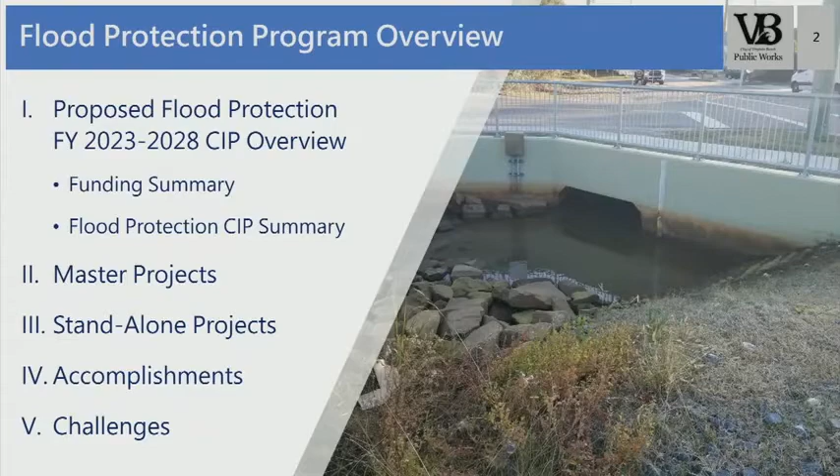I'm going to begin by giving you an overview of the program, followed by the creation of the master projects within the program. I'll touch on the standalone projects, accomplishments, and some challenges we are facing.

This is how the flood protection program is funded. The bond referendum comprises most of that funding at over 76%, followed by appropriations to date of local funding at 21.5%. The other small pots of money include flood protection pay-as-you-go at $5.5 million, federal funding at $8.1 million, which is FEMA reimbursement funds we received several years ago, and state funding of $4.1 million, which includes grant funding from the state's Community Flood Preparedness Fund. So the program has a total of $757.1 million for 41 projects.

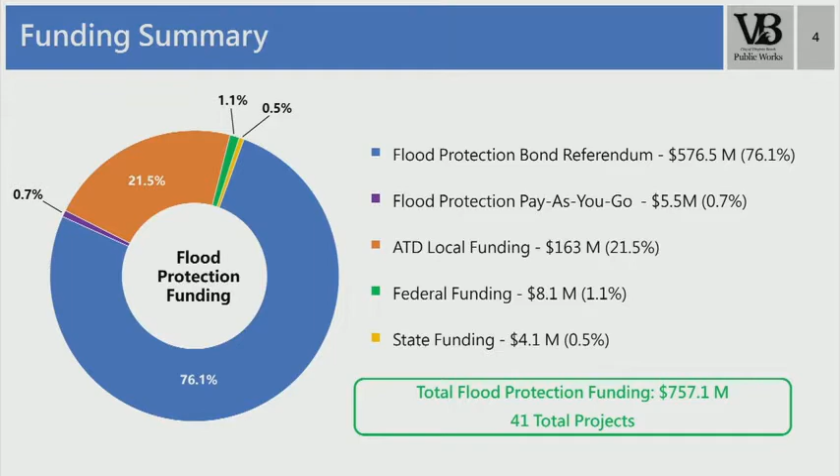The flood protection program is a new standalone CIP this year. If you recall, in the past, the flood control section was included in the stormwater CIP with operations and maintenance and stormwater regulatory. Now we are a standalone CIP.

As I said, there are 41 total projects. We have created 7 master projects that contain 30 projects within those master projects. The idea behind the master projects is they have companion projects associated with each one, and all of the appropriations to date within the companion projects can be transferred with city manager approval between projects in order to advance these projects more quickly. All transfers will be reported to the Flood Control Community Oversight Board monthly.

We also have 11 standalone projects and programs that are programmed at over $102 million included in the flood protection program.

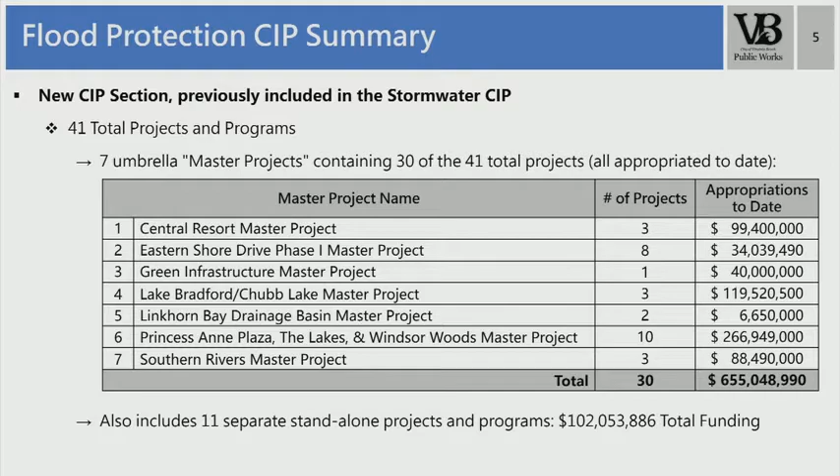Now I want to talk in more detail about the master projects. The first one is the Central Resort District. It includes three projects, and you can see the appropriations to date on each of those projects. These three projects will be constructed together. The bounding area for the Central Resort District includes Laskin Road to the north, Atlantic Avenue to the east, 17th Street to the south, and Birdneck Road to the west. These projects are still in the planning stages, and as I said, they will be constructed together.

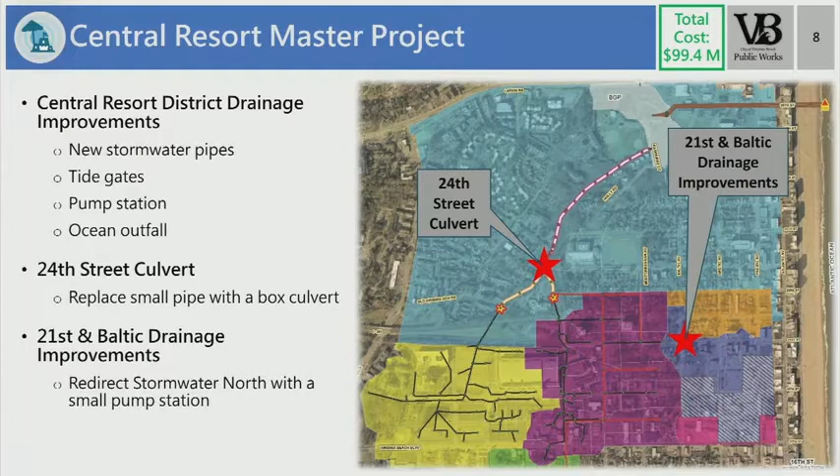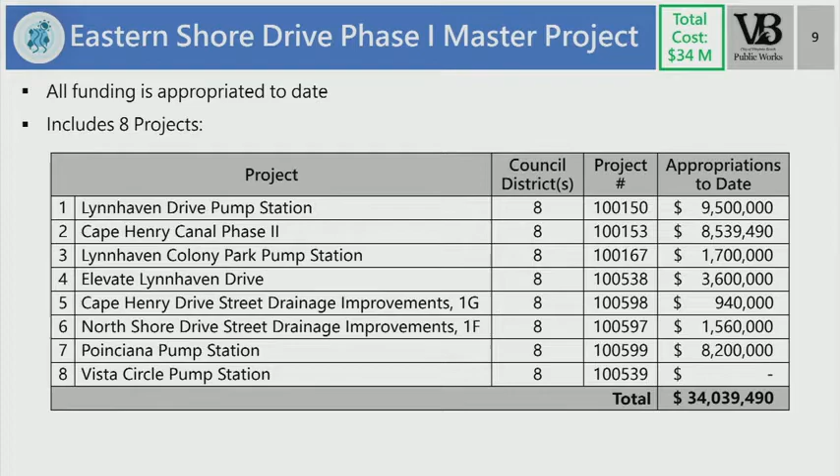The next master project is Eastern Shore Drive Phase 1. It includes 8 companion projects, with total appropriations to date of $34 million. These are all the projects within the master project. We will be constructing 4 new pump stations, side street drainage improvements along the north side of Shore Drive, and side street drainage improvements along Cape Henry Drive. We'll also be elevating Lynnhaven Drive at the intersection of West Great Neck Road and Lynnhaven Drive.

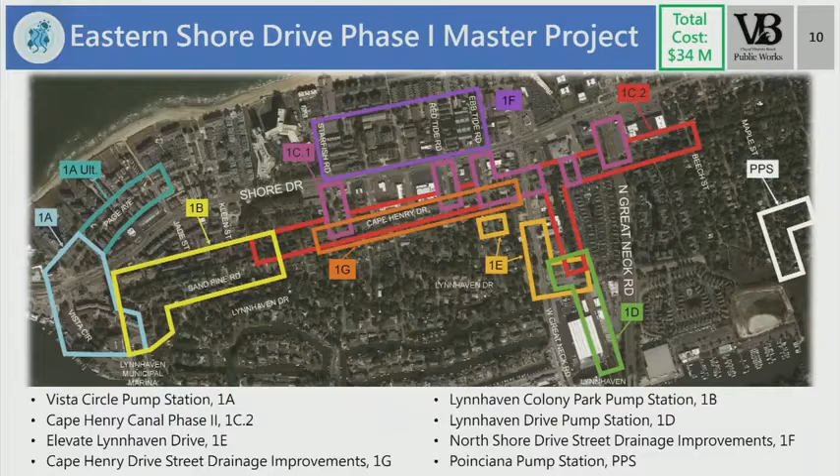We did submit an application for the BRIC grant, the Building Resilient Infrastructure and Communities grant. That grant would design and construct the Lynnhaven Colony Park Pump Station, the Cape Henry Canal Phase 2, the Lynnhaven Drive Pump Station, and elevate Lynnhaven Drive. If we are successful in obtaining that funding, all 4 of those projects would be constructed together. However, if we're not, the plan is to design and construct the Lynnhaven Colony Park Pump Station, Lynnhaven Drive Pump Station, and Cape Henry Canal project together. The rest of the projects in this master project will be designed and constructed separately.

The Green Infrastructure Master Project includes 2 sub-projects, and the appropriations to date for this master project is $40 million.

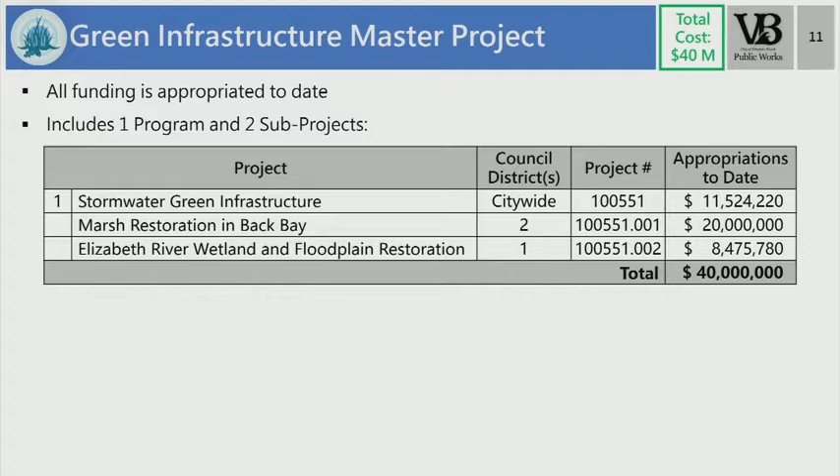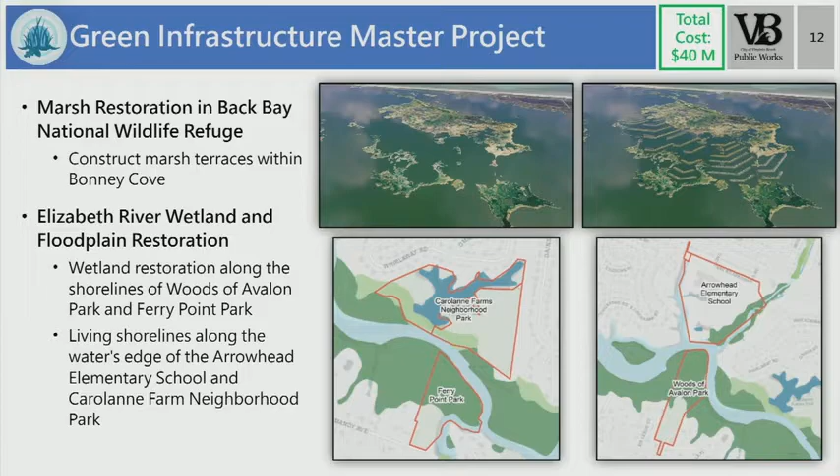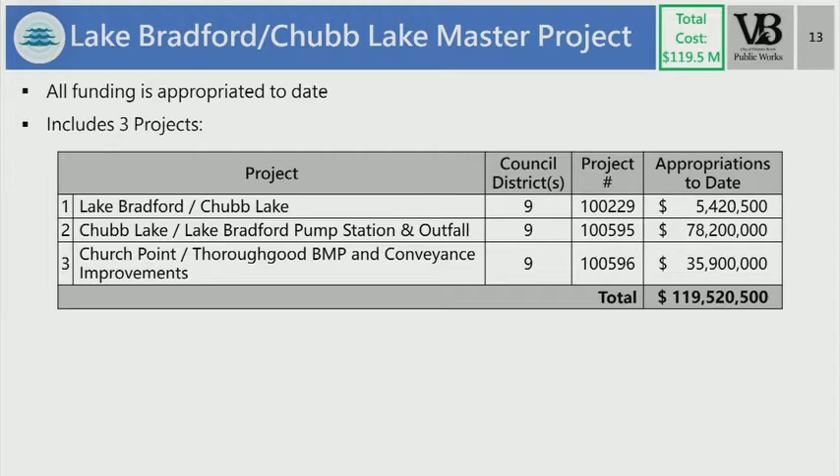The Lake Bradford Chubb Lake Master Project includes three projects with appropriations to date at $119.5 million. The first project, Lake Bradford Chubb Lake, was the original parent project of this program, and it includes two sub-projects.

The first, the Lake Pleasure House Outfall, will begin construction this summer and is estimated to be complete by spring of next year. The Lake Bradford Dredging Project will be advertised in a couple months, with construction expected to start in late summer and be completed by the end of 2023.

The Chubb Lake, Lake Bradford Pump Station Outfall has not started. We are in the process of doing the pump station location study for this project. The plan at this point is to have this project be a design-build delivery, and the Church Point Thoroughgood BMP and Conveyance Improvements Project will be a standalone design-bid-build project.

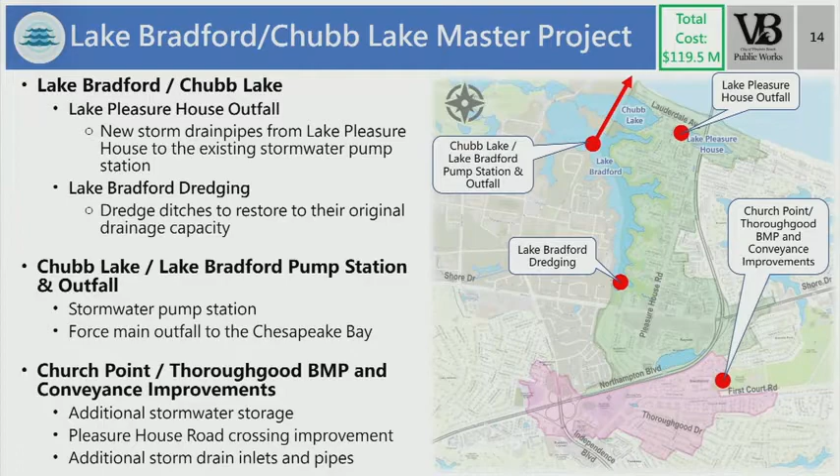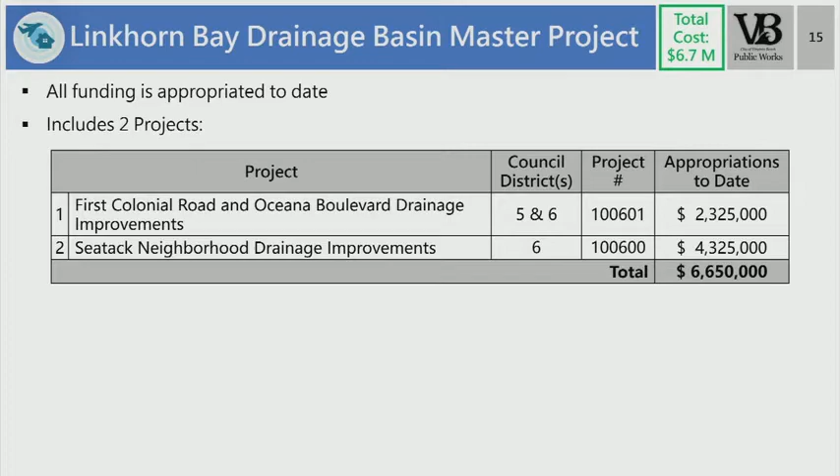The Linkhorn Bay Drainage Basin Master Project includes two projects. Appropriations to date are $6.7 million.

The first project, the First Colonial Road and Oceana Boulevard Drainage Improvements Project, we submitted a Community Flood Preparedness Fund application from the state for $1.8 million for this project. We just submitted it last week for the round 3 funding. The design for this project has not started.

The Seatack Neighborhood Drainage Improvements Project, we were awarded a Community Flood Preparedness grant from the state for $1.9 million, and we are just scoping the design for this project.

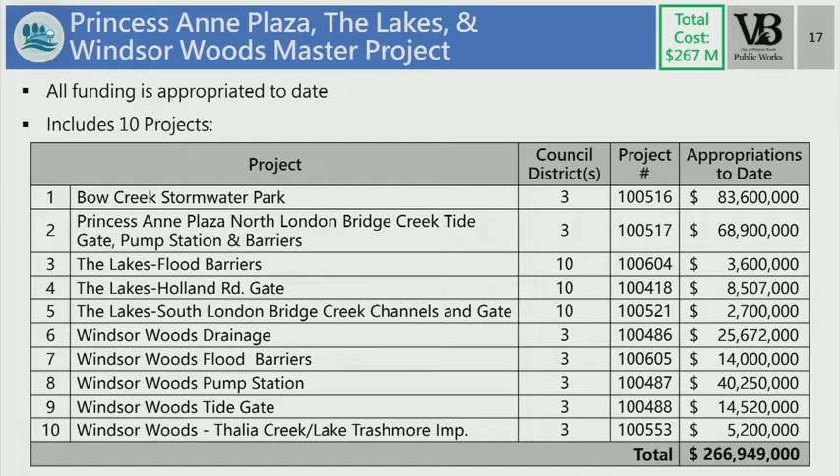The Princess Anne Plaza Lakes and Windsor Woods Master Project includes these 10 projects with over $266 million appropriated to date.

The first project that will be constructed within Princess Anne Plaza is the Bow Creek Stormwater Park. Right now, we are currently at approximately 60% design on phase 1.

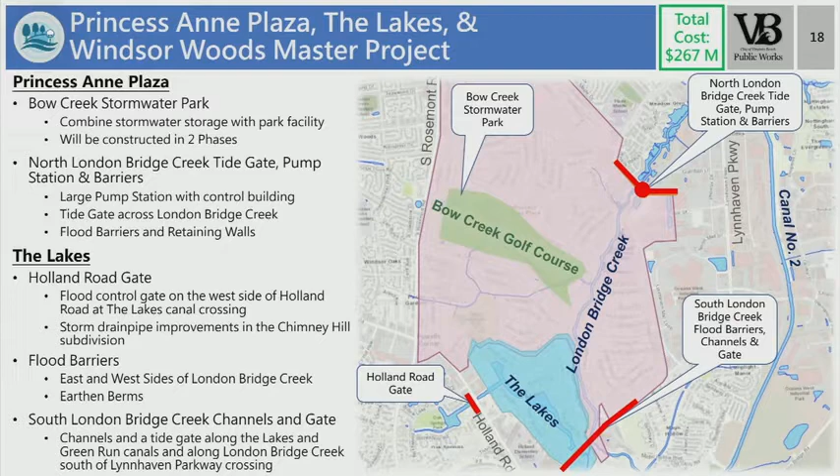The next project, the North London Bridge Creek Tidegate Pump Station and Barriers Project, and the three projects in the lakes - the Holland Road Gate, the flood barriers, and South London Bridge Creek Channels and Gate - all three of those projects will be included as part of one design-build contract.

In addition, in Windsor Woods, the Pump Station Project, the Flood Barriers Project, and the Thalia Creek Lake Trashmore Improvements Project will also be included in that one design-build contract.

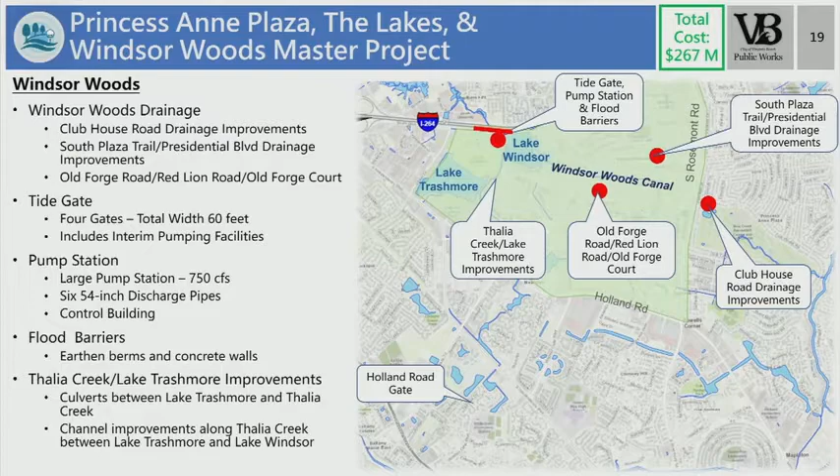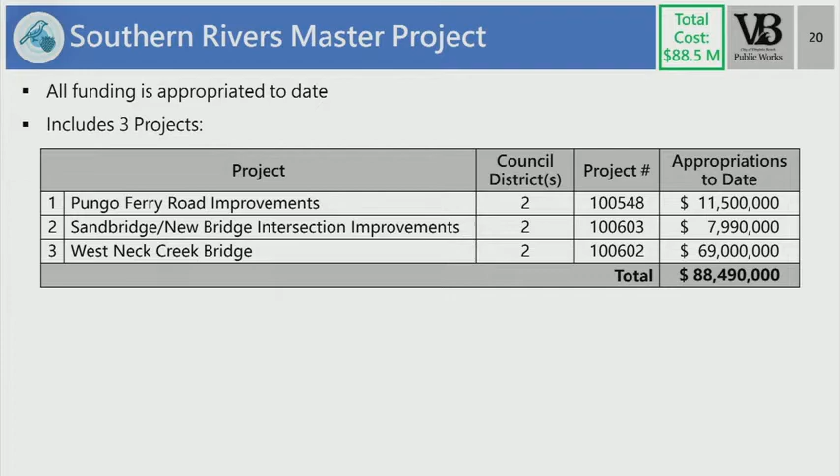The Southern Rivers Master Project includes these three projects with a total of $88.5 million appropriated to date. All three of these projects are currently in the planning stages.

For Pungo Ferry Road, we will be raising Pungo Ferry west of the bridge all the way to Blackwater Road. That project, the delivery method is still to be determined.

The Sandbridge-New Bridge intersection improvement project is also still in the planning stages. This project will raise the intersection and add a large box culvert under New Bridge Road.

And then the West Neck Creek Bridge project, this is a very large project. We are also still in the planning stages for this project, and the design and construction method is still being determined.

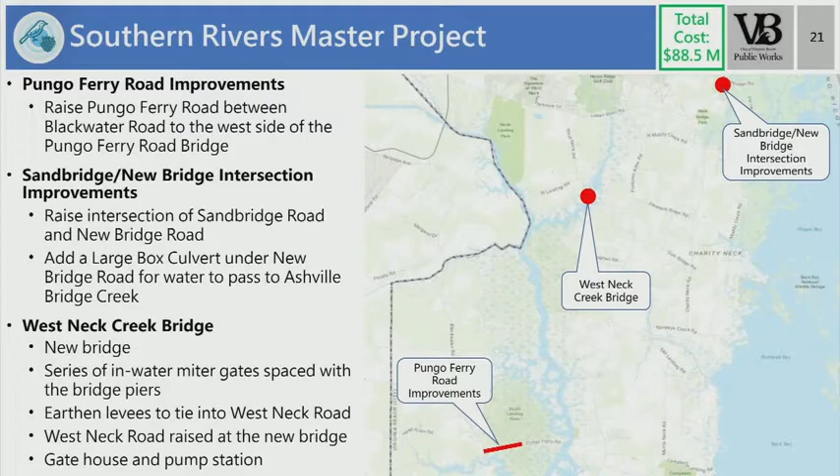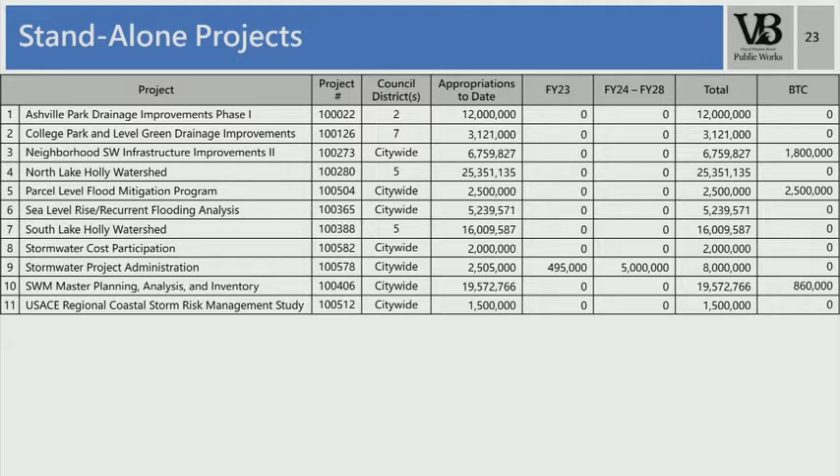So the standalone projects in the flood protection program include these 11 projects and programs. You can see the appropriations to date for each of those. I'm not going to go into detail on these, as they have been in our program for a while now.

Moving on to the accomplishments, we completed construction on three projects in the last year: the 50th Street Drainage Improvements Project, the Cape Henry Canal Phase 1 project, and the Aragona Drainage Improvements Project. We have also completed the master plan for the Upper West Neck Creek Drainage Basin.

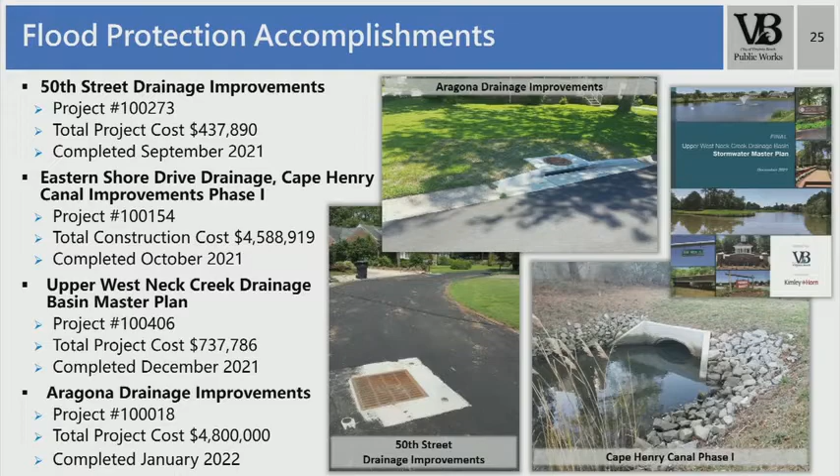So I'll close today with some challenges. The first two you see here you will probably hear about the rest of this afternoon. Obviously, escalating costs and inflation are a concern moving our program forward, as well as supply chain disruption and material sourcing issues. We've already experienced a delay on one of our projects in construction because of materials.

And the last one, the previous absence of state and federal assistance. I'm happy to say we were chosen to be in the Army Corps of Engineers work plan for the Coastal Storm Risk Management Study. That will put us in the queue to have federal funding on our projects once those projects have been identified after their study is complete.

And then with the state funding, we have been successful in getting Community Flood Preparedness Fund grant funding for several of our projects, but the future of that funding is still unknown, so we don't know of any future state funding sources for our projects.

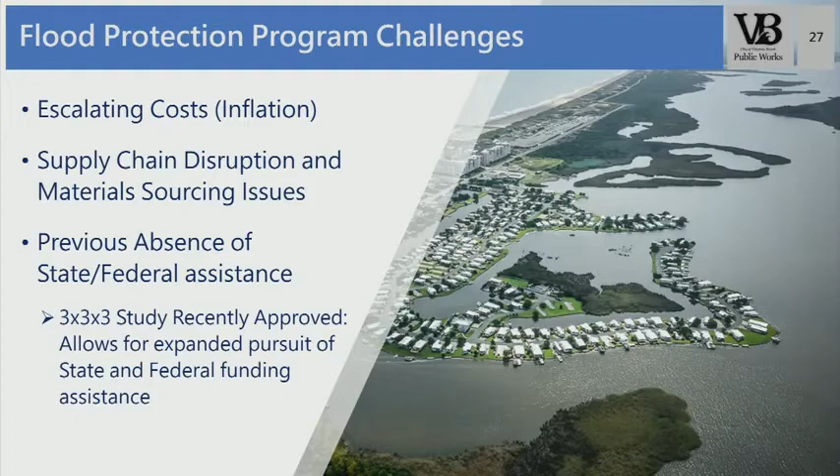And with that, I'll take any questions.

Any questions? Toni, I noticed one thing - it seems that projects are pretty well distributed throughout the city. Yes, I would agree.

The 7 master projects are distributed in equal areas throughout the city. I think that's important to realize going forward, that we're not zeroing in on one area. When we had the bond referendum, we wanted it explicit that this was going to be a tangible benefit to the entire city.

So I just want to applaud you. Mr. Bellucci. Thank you, Mayor. Hi, Toni. How are you? It's nice to see you. Good, thank you for your presentation.

I just have a question in terms of the CIPs as recommended. How much of the element of risk to neighborhoods and communities did you formulate into your recommendations? In other words, if there's a higher likelihood that a neighborhood could flood or will flood, did that priority enter into your thinking when you made these recommendations for how these projects should be funded?

Sequentially, yes. The original projects from the bond referendum were projects that were already underway and still needed funding. For example, Windsor Woods, Princess Anne Plaza, and the Lakes, the areas that experienced some of the worst flooding after Matthew, were high priority projects. In fact, they were among the 6 projects originally proposed in the CIP back in FY2017 when the first infusion of funding came into the CIP.

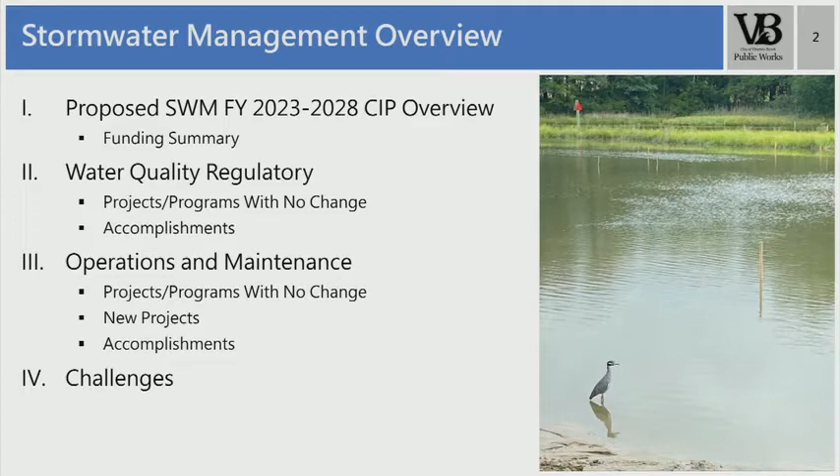Funding for the remainder of our stormwater management program is split approximately 70-30 between the maintenance and water quality regulatory sections, with a total 6-year program funding of $166 million, covering 35 projects and programs.

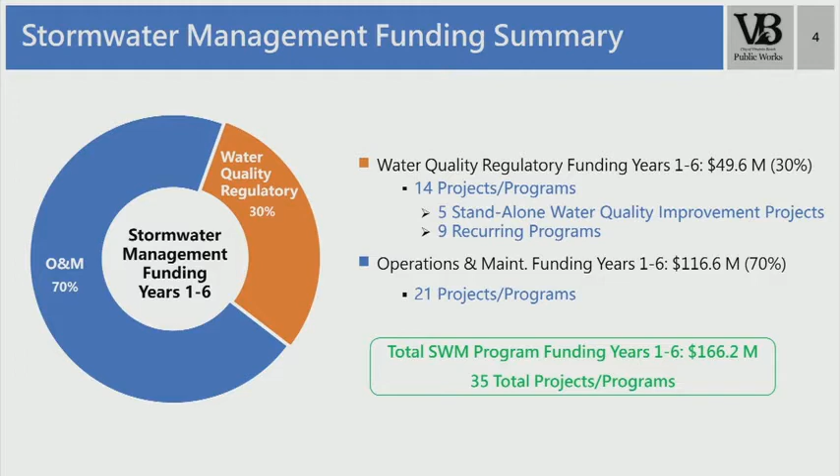I'll dig further into the water quality regulatory section. We have 5 projects requested at target. All 5 have been presented in the past. 4 of these projects are enhancements to existing lakes, which add features such as forebays and wetlands for added water quality improvements. The 5th project at the bottom of the table is the Lynnhaven River Basin Ecosystem Restoration Project. That's a tongue twister, it gets me every single time.

This is a commitment to the U.S. Army Corps of Engineers through a cost participation agreement. The project had a lot of really good things happen this year that I want to touch on at the end of this.

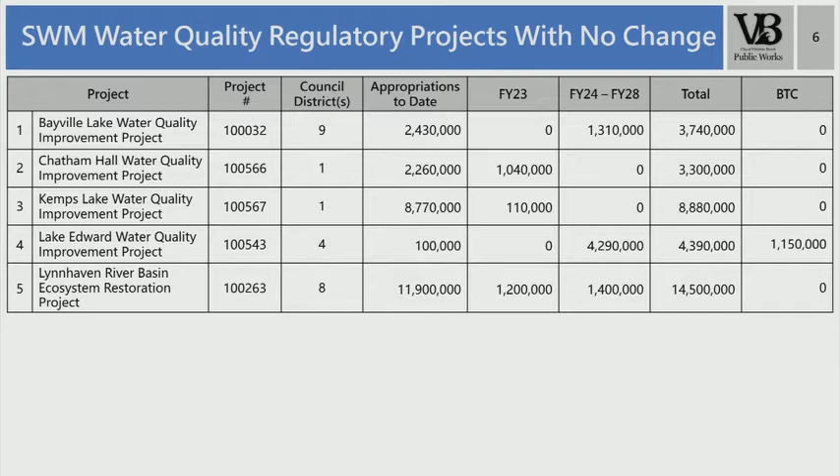The majority of our regulatory section is programmatic in nature. Most of these programs are driven by TMDL requirements, which are like a pollution diet for our lakes, streams, and rivers. These TMDLs are applied throughout the city, and we have developed 5 of our programs to focus on water quality improvements in different watersheds within the city.

Watershed-based programs may fund smaller water quality improvement projects. Projects that are more than $1 million, we split out into the standalone. If we can cover it with less than that, we keep it in these watershed programs.

Another programmatic CIP of note is the Surface Water Regulatory Compliance Program, which funds many of the essential programs required by the city's MS4 permit, addressed each year in our annual report to DEQ.

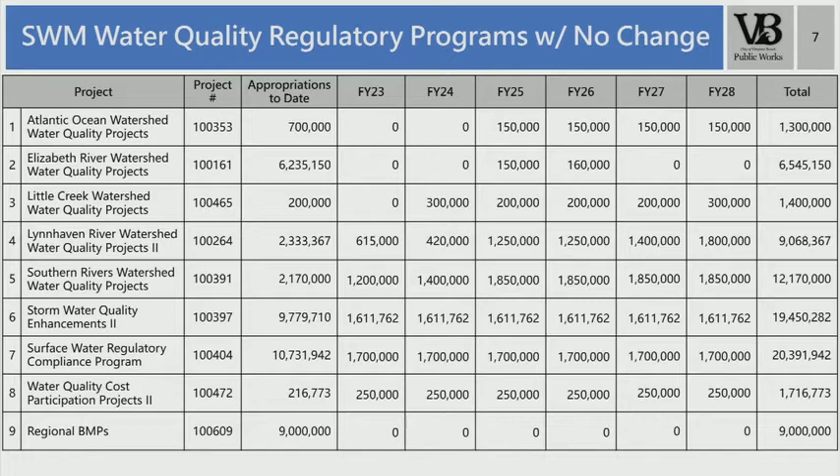It's always worth bringing this one up because this program includes inspections and audits by DEQ and EPA every 5 years. If either agency finds noncompliance, they can issue a fine of up to $32,500 per day per occurrence. Doing the math, that adds up to $12 million per year per occurrence, assuming we only have one occurrence. So it's a very important program.

I want to get back to that accomplishment with the tongue twister project that I'm not going to try again. This project achieved outstanding progress this year. The project overall supports Chesapeake Bay and Lynnhaven River restoration efforts.

This is an example of a successful partnership between the City of Virginia Beach and the U.S. Army Corps of Engineers, and also great coordination within multiple city departments. The city participates in a cost-share agreement with the Corps to contribute $14.5 million of the $40 million total cost.

Phase 1 of the project completed construction in both the oyster reef habitat and the wetland restoration at Princess Anne High School. The oyster reef was completed this year, almost a year ahead of schedule, at a significantly lower cost. It installed those little oyster balls, the concrete structures that oysters can grow on and help clean our river water.

I was going to bring one in. I couldn't figure out all of the logistics to do it, but it's a very great show and tell. If anybody wants to see one, I think it's really cool, so I get excited about that.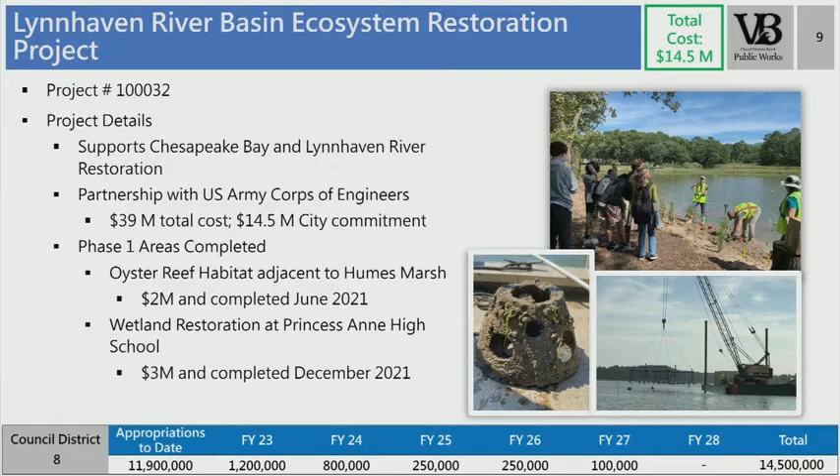The wetland restoration has also been a great success, partnering with schools on the location. Students at City of Virginia Beach Public Schools helped to plant a section of the wetlands this year, and the Corps of Engineers held a workshop with teachers on how they can take classes out there and teach both classes and also perform important monitoring duties for the long-term health of this wetland. We're very proud of our Virginia Beach students for the great work they are doing and continue to do to improve the city's water quality.

And with that, I'll turn it over to Mark.

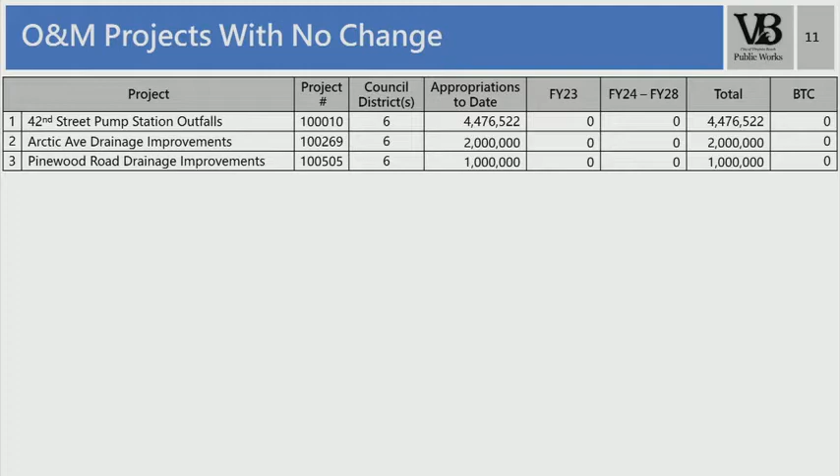We've got a couple weeks left wrapping up that project. I have a future slide showing some photos of that. That was a really cool project with multiple contractors. Had a few challenges, but it turned out really well. Looking at O&M projects with no change, FY2023, totaling about just under 18 million, 17.89 to be exact.

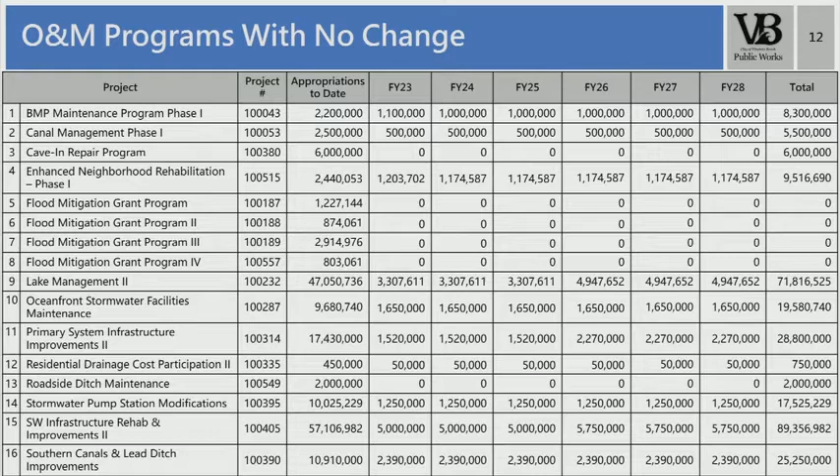Looking at new projects, we have two. You're familiar with the ARPA federal funding for the American Rescue Plan for both the dredging and the rehab. First up to bat is the Enhanced Neighborhood Rehabilitation Program. So as you're aware, it was to add

funding for $23.58 million to adjust rehabilitation efforts. We currently have 9 of 16 neighborhoods under design and scoping for construction. Under the total cost, as mentioned, $23.5 million. Our funding obligation deadline is December 31st, 2024, and then we have to finish construction by end of year 2026, and we are currently on track to do so.

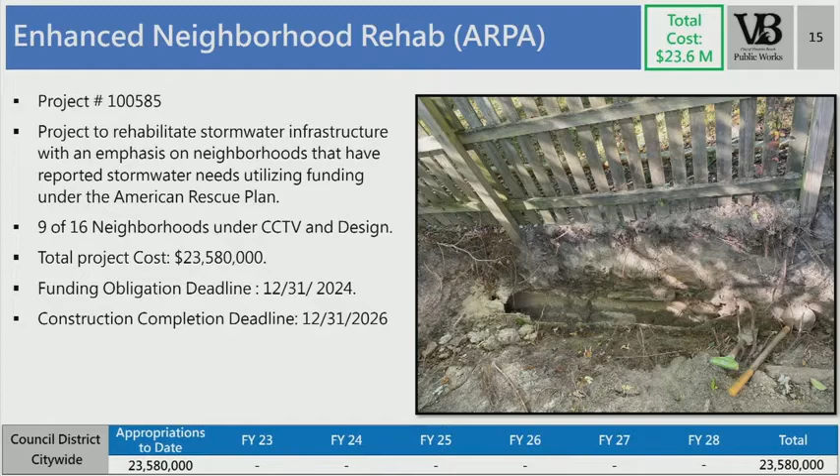Next up is lake management. Same project, same type thing, to add $21.3 million to our dredging program. We're currently 14 lakes under design. That'll be done in a bid package type grouping of a few lakes each. Same thing, funding obligation deadline will be 2024, construction 2026. And you've seen a couple of photos here.

This is Glenwood 7, which is currently under construction, not using ARPA dollars, but since we don't have an ARPA lake under construction, I thought I'd show you a typical lake, what it'll look like, just like a normal lake under construction. This is one in Glenwood under the capital side, under 100-232 CIP.

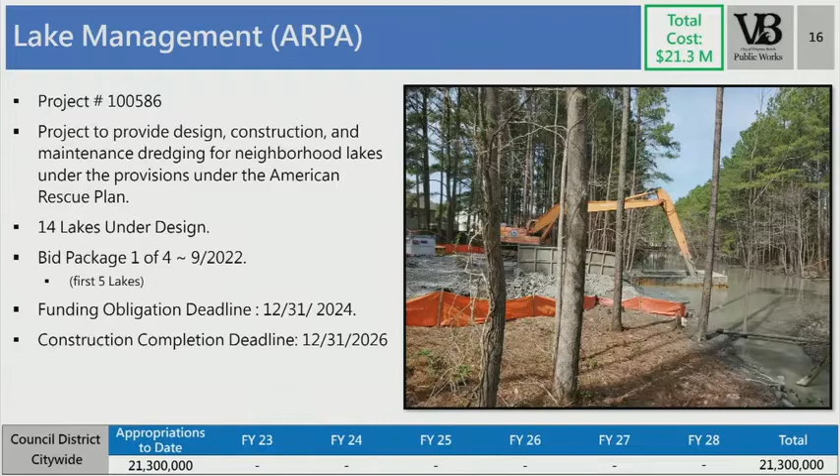Moving on to accomplishments. The first one is Site 18 out in the southern watershed. This is a before and after looking from Pleasant Ridge Road. This was approximately just under 4,000 cubic yards of material removed. Total cost was just under $1.4 million. We completed this in January of this year.

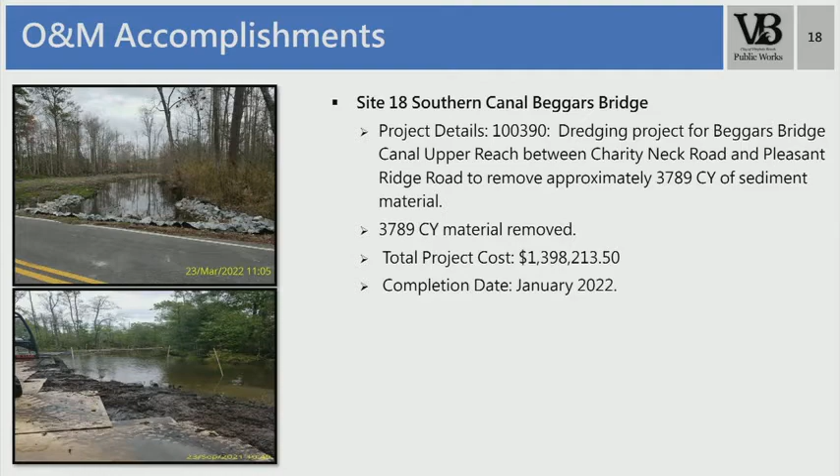Next up was Site 15 on the other side of Beggar's Bridge between Pleasant Ridge and Charity Neck, on the other side of the Beggar's Bridge Reach. It was approximately 3,200 cubic yards, just under $2 million total construction and design cost, and was completed just last month.

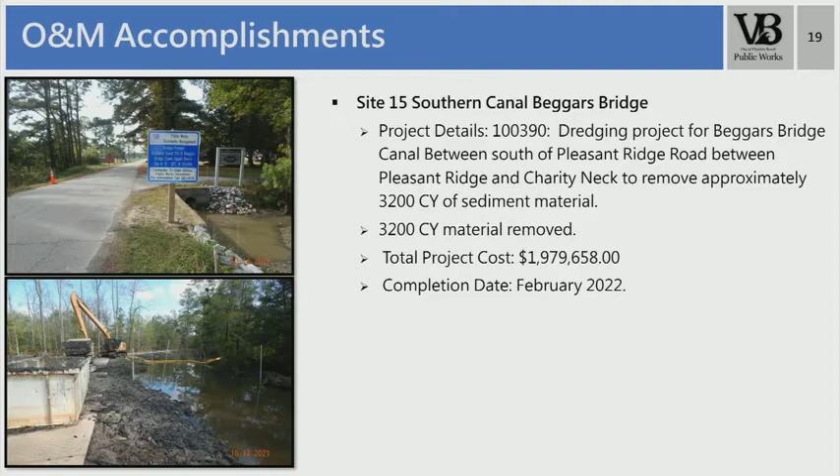And next is Pinewood Road, which I mentioned earlier, which should be wrapping up by the end of this month. Total cost was just a hair over $2 million, between two contractors, and you can see some construction photos there of the new double box culvert and the sheeting with construction in place.

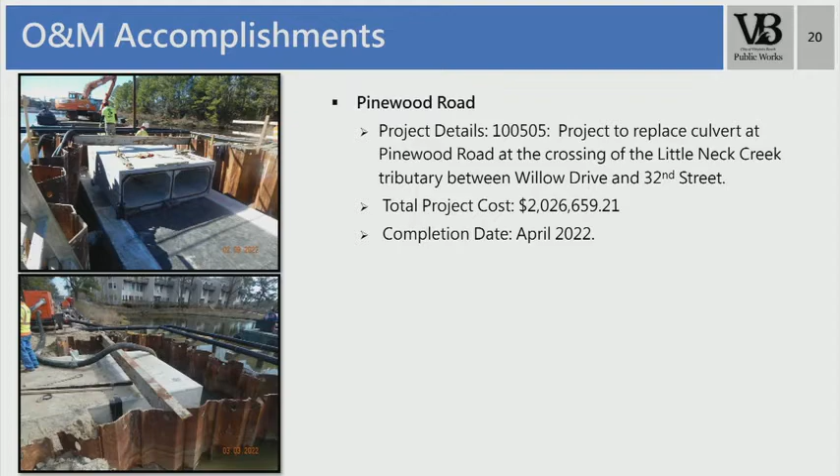And we have another dredging project, Stratford 3, which wasn't a high cost project, but it was an exceptionally challenging project with all the administration, hold harmless agreements, the real estate, city attorney's office. It was a big win for us, and a big shout out to them for helping us overcome a lot of significant challenges with that project. We wrapped that up in that whole lake system in February, and that was a big win for the residents out there because it tied in to several other capital projects, so we were pretty glad to wrap that up.

And then lastly, a rehab project, Brigadoon Christopher, it's about 27,000 linear feet of pipe. It was a little over $1 million, and it's estimated to be complete in May. We're just wrapping up the construction. Photos here of a typical lining operation.

This is what you'll see typically too for ARPA. You'll see this all over the city and spread out in all the different districts that you represent, construction lining and for the pipes that we line and repair to extend the life of them for the next generations to come.

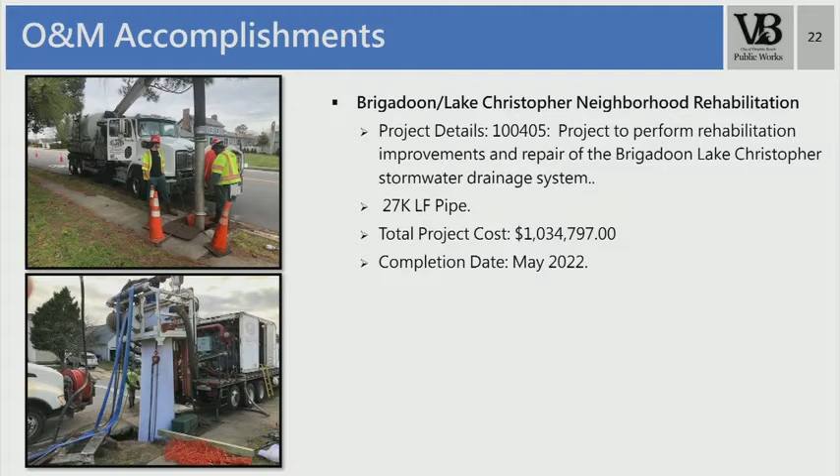And then lastly, can't have a successful program without challenges, because it all doesn't go perfect. So as with the flood control program, overall construction cost increases, we're seeing it in the maintenance side of the house as well, and funding for current and future maintenance requirements. We'll continue those efforts as best we can with the American Rescue Plan. We're working as best we can with what we have on the maintenance cycle and backlogs to satisfy the residents. But we get new requests every day, and we're working on the ones that we have.

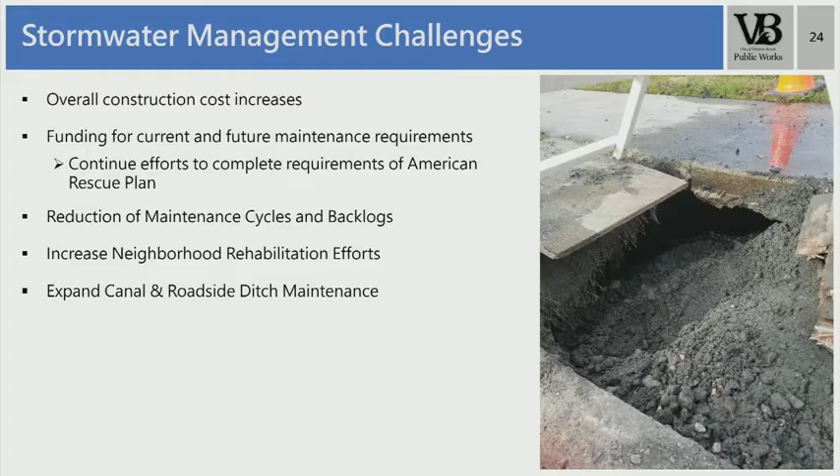Increase and keep pushing those neighborhood rehabilitation efforts because the residents do like to see that production in the neighborhood, to return to that current rain event, rain to the drain type maintenance cycle, and then expand canal and roadside ditch maintenance the best we can as funding allows. And with that, I will turn it over to any questions you may have.

Rocky. Yeah, Mr. Mayor, if you go back to slide 21, I just had a question about that Stratford Chase. Yes, sir.

That dredge right there with the crane on it - is that sitting on planet Earth or is it sitting on water? It's floating on a barge, getting ready to float. I can't tell if there's water underneath it or just soil from the earth.

That's actually right at the entrance to the lake, getting ready to be launched. That's the same shot - if you go out there now, that's what Stratford looks like now. So they floated that in there at top.

And then they float it, go through the canal, and do the center channel to dredge to plan. Then they put it in a dump bucket to drain, and haul it out by truck out to the pit.

I didn't know if it was a wheeled vehicle driving in there, because in this picture it almost looks like it's soil that it's driving on. We build a construction entrance per plan where we have easement access, bring in our construction equipment, put it on a barge, and float it out through the access way.

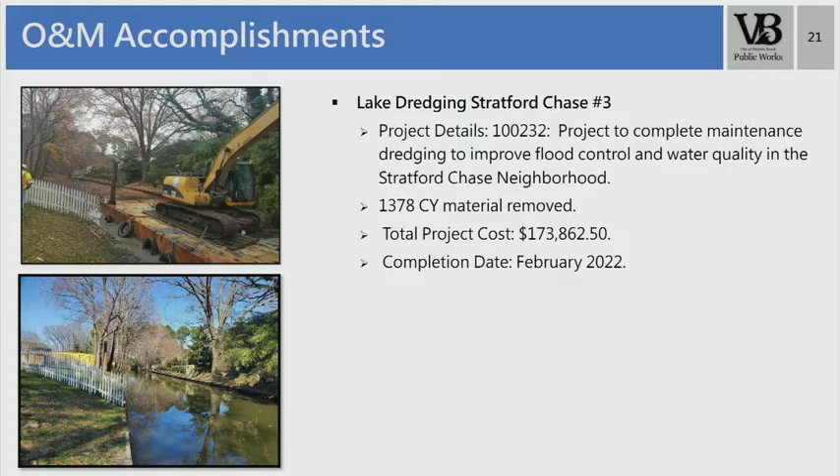That's where the encroachments come into play, because a lot of these waterways are very narrow, and people build these elaborate structures because they consider it waterfront property. They get kind of extravagant with their docks, sheds, and bars that they want to build on their little waterway.

My favorite project, I'm going to ask you about - the Lead Ditch, right? I just want to compliment the contractor that did Site 18. They really did a good job, much better than the previous contractor who had done other projects for this overall.

I still would love to walk that, but before the cottonmouths get real active. And Site 15 was the other side - I never really saw it come out. Well, it's done, it's complete all the way from Pleasant Ridge down to Charity Neck. And the entrance is at Dolly.

That's the entrance at Dolly, I believe, right? Or is that Site 18? Well, where the dolly came in. But anyway, I'm very familiar with that area. 'Cause I know you are - I rode out there many a time. That's your stomping ground since the 70s.

I was there for your history lesson, okay. But this project - now that you've done the Beggar's Bridge projects, this is the one that everybody depends on. So will y'all be moving now down to Nanny's Creek or some of the other watershed areas? Yes ma'am, that's the plan.

Actually, we've got Site 11 in purchasing, waiting to bid. That's already been designed. And we're also working on - we took that '99 report, the PBS&J report, and we put some engineering with that and overlaid it with our current O&M program and a bunch of stuff.